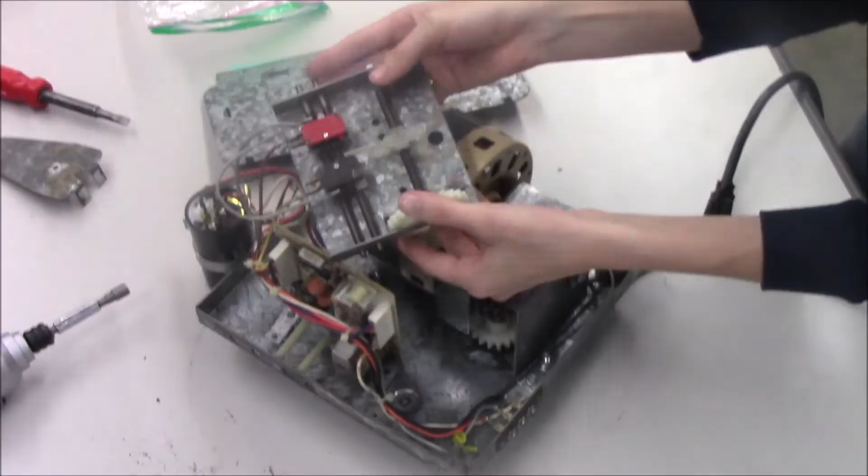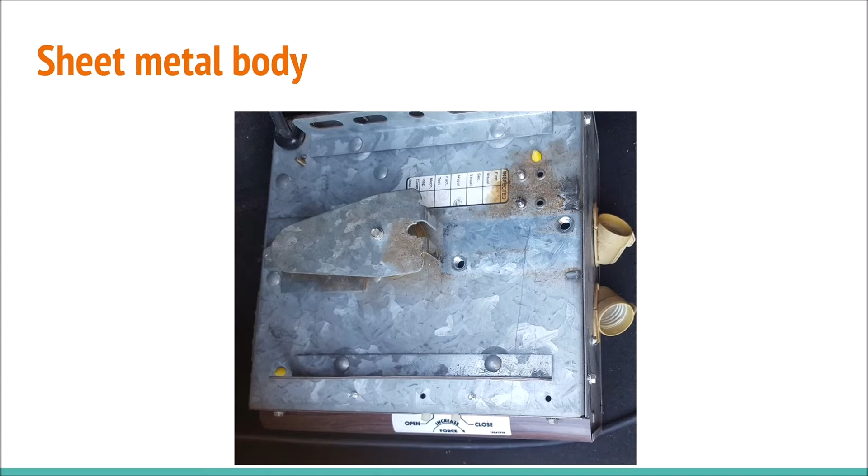Many of the housing components of this garage door opener appear to be made out of sheet metal. To name a few, from left to right, we have a chain guard, a front panel, and a rear panel.

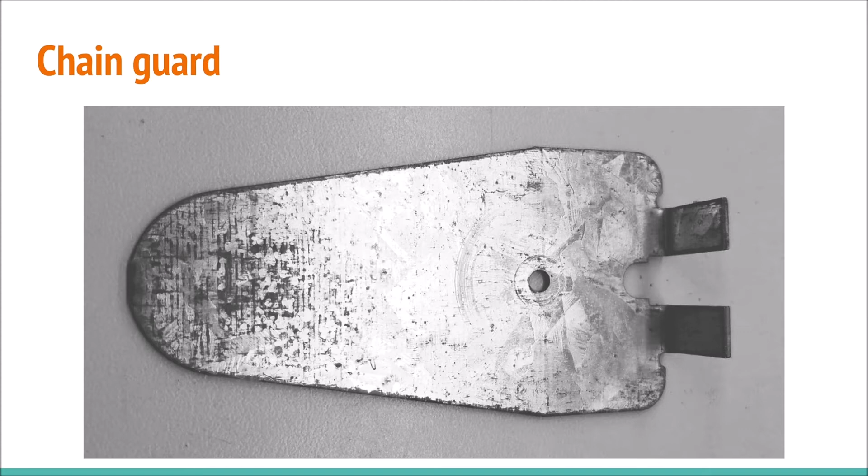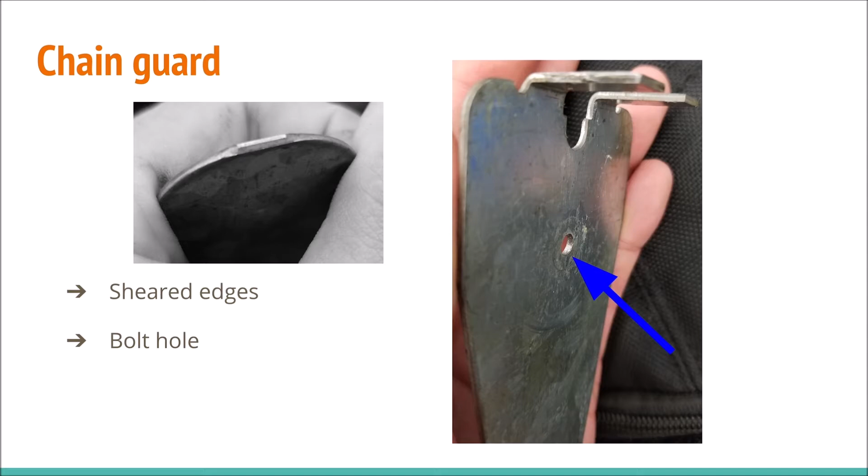Let's take a closer look at the chain guard. The flat outline of the guard was likely created through a process called blanking, as evidenced by the sheared edges and tool marks where the shear blades penetrated the stock material. The bolt hole near the center could have been done by die cutting or drilled. The two prongs were likely die bent due to their simple geometry.

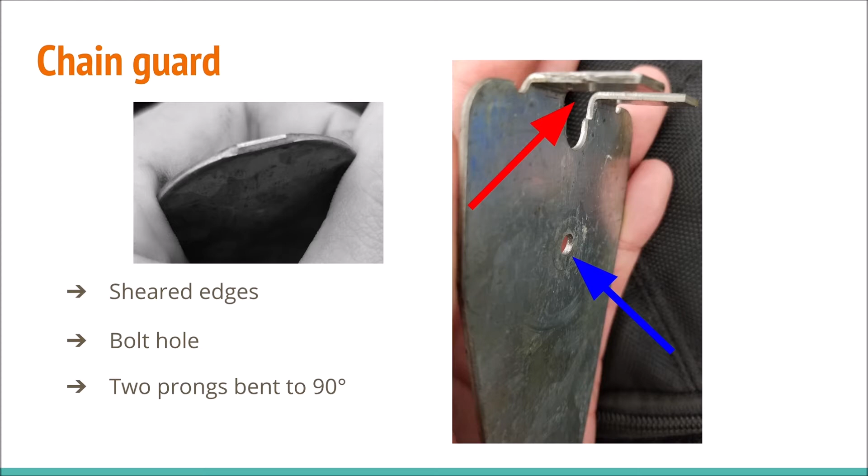Alternatively, the entire piece could have been stamped using a combination die that would cut the blank and form the final part all in one step.

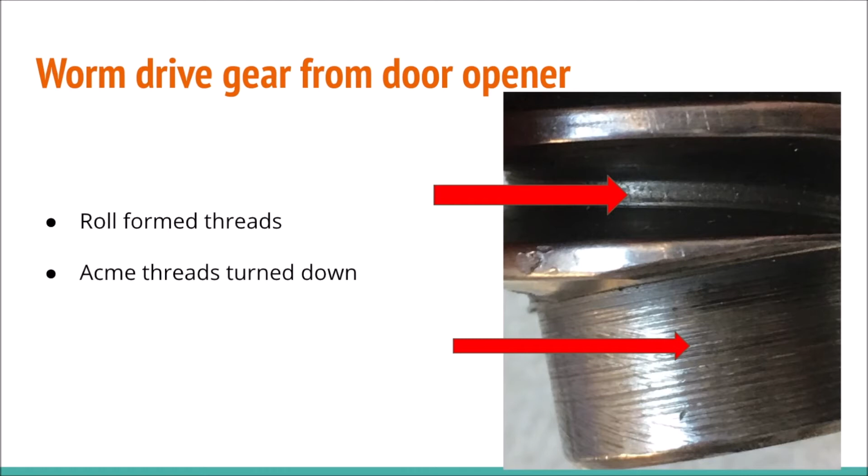Next, we examined the steel worm gear. The Acme threads were roll-formed given how smooth the minor diameter of the thread is in comparison to the rough surface finish where the threads were removed on a lathe. Alternatively, the threads could have been cut, but the threads would be weaker because compressive stresses imparted on the thread's surface during roll forming leads to resistance to shear.

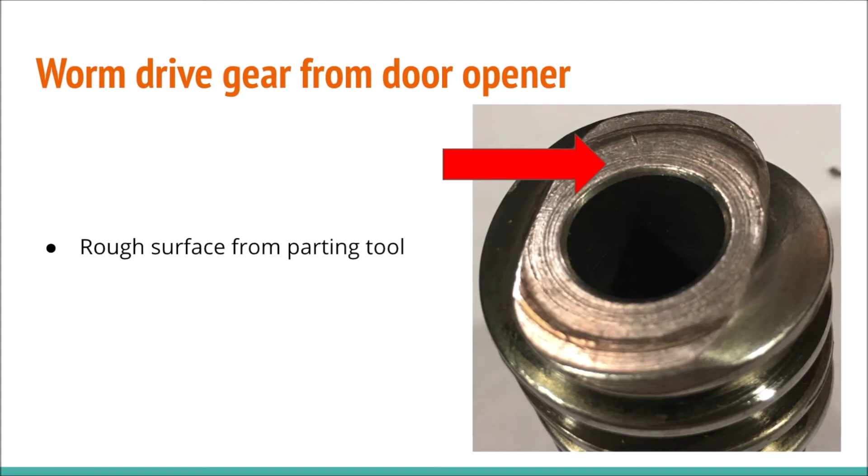A parting tool possibly caused the rough surface finish at the end of the component where it was cut to length on a lathe. Scoring on the inside of the roll pin hole is evidence that it was drilled. The center hole was drilled given the visible helical pattern. The component alternatively could have been made from hollow cylindrical stock to reduce the amount of material to be removed for the center hole.

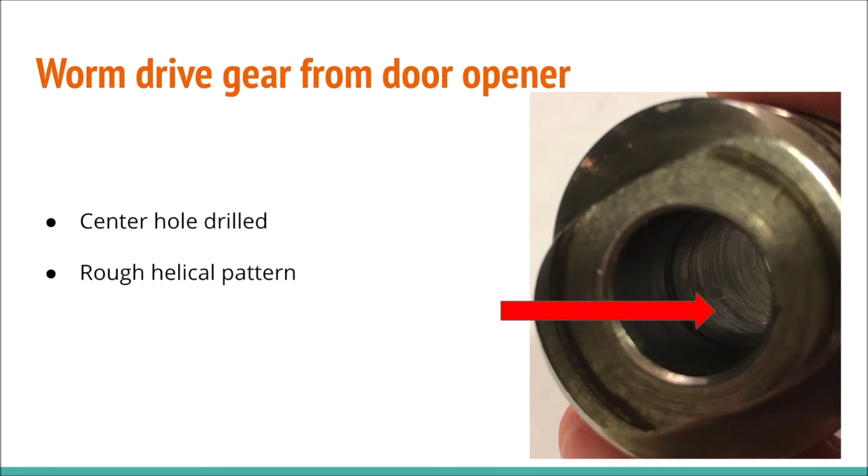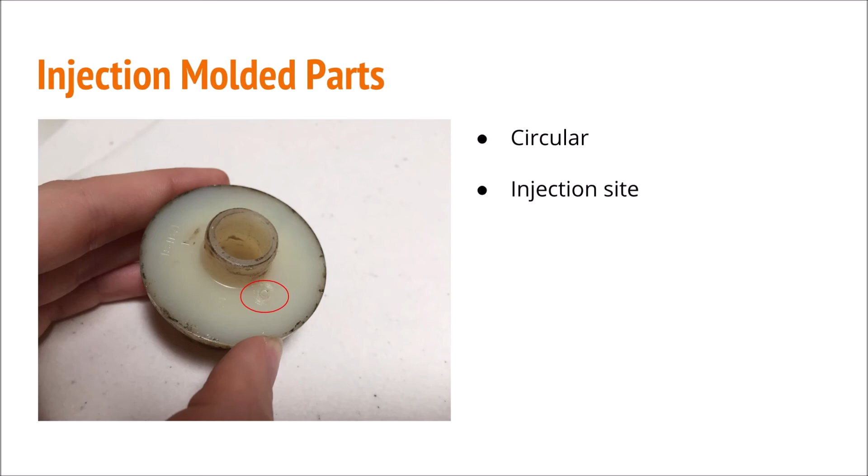Some of the parts are injection molded. This pulley was clearly injection molded because it is circular in cross-section and has a visible injection site that can be seen here. Flipping it over, we can see the simple geometry as well as 6 ejection pin marks.

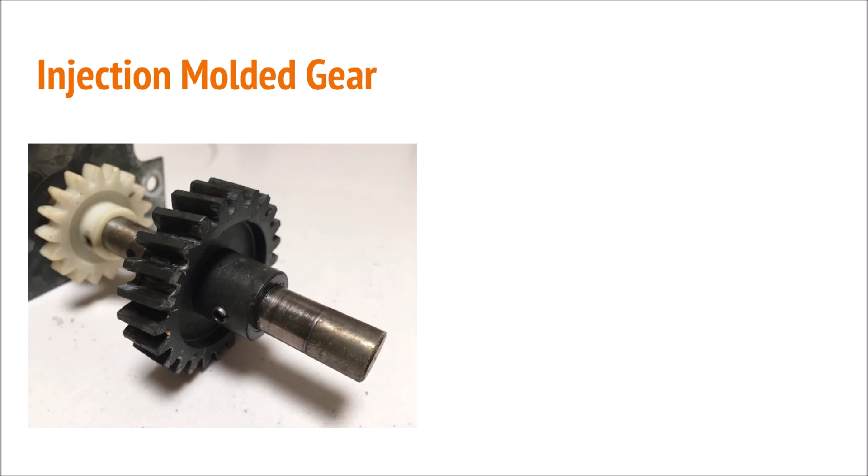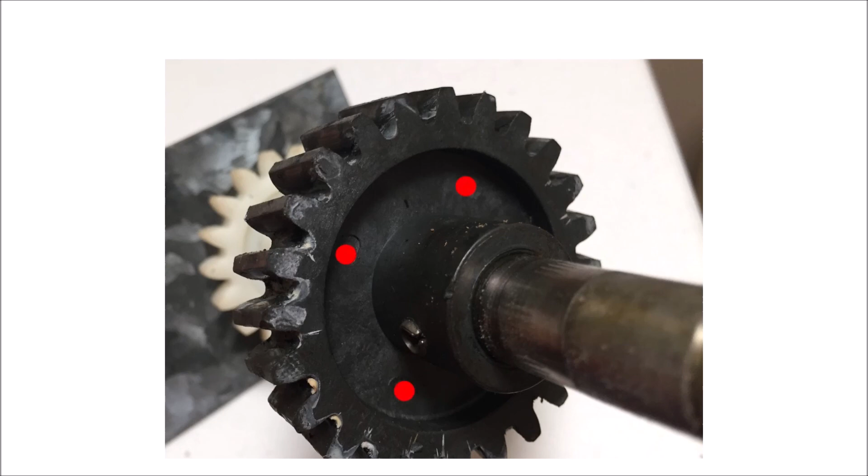There is also an injection molded gear. In this picture, you can see that the teeth are slanted. From this angle, you can see the ejection pin marks. As the gear was ejected, it spun counterclockwise. This caused the pins to drag and leave marks on the surface. All of this is consistent with injection molding.